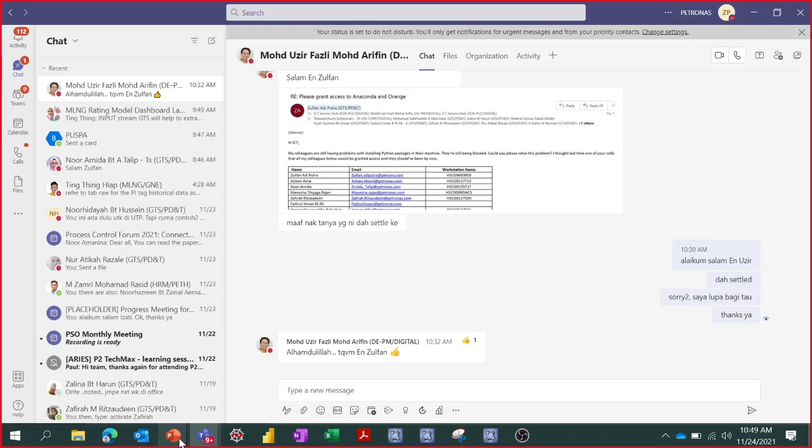Hello, sorry, oh you came back in. I clicked something, pressed the wrong button. I have to redo this. Why is it now, sorry. Okay, I'm sharing the slide. Let's share the slide. You're back here again. Good, okay, I think you can see my slide. Can. Yep, okay.

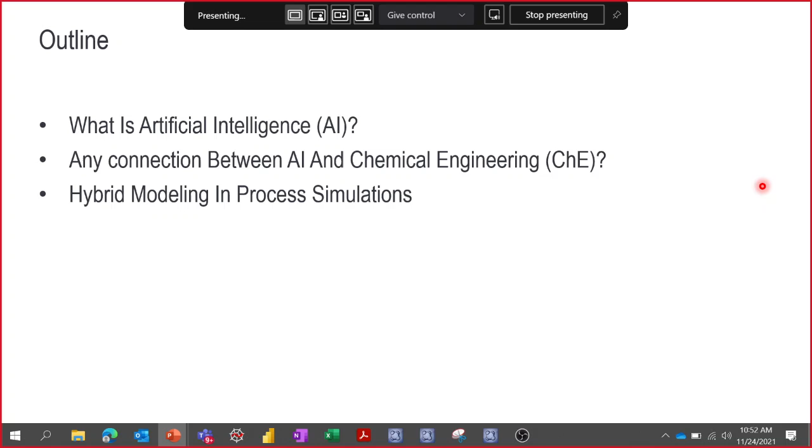So it's not just first principle process modeling as we know up until now. I'll divide my talk into: first I'll introduce what is AI, at least from my perspective, what I know, and then we'll see if there's any connection between AI and chemical engineering, because most people see AI as more like computer science, more like IT and stuff - so what does it have to do with chemical engineering? Lastly, I'll show the hybrid modeling in process simulation, and how we internally in Petronas use this hybrid modeling.

So what is AI? I think you know about this Terminator stuff. If you hear a word like AI, because of these Hollywood movies, what we have in mind is Skynet - the neural net based artificial intelligence. These robots think that humans are the cause of the planet's destruction - we have CO2, global warming, forest fires, we are destroying planet Earth. So this computer, being very intelligent, decides humans are the major cause of the planet's destruction, and so it must destroy humans first in order to save the planet. That's basically the idea of this Terminator.

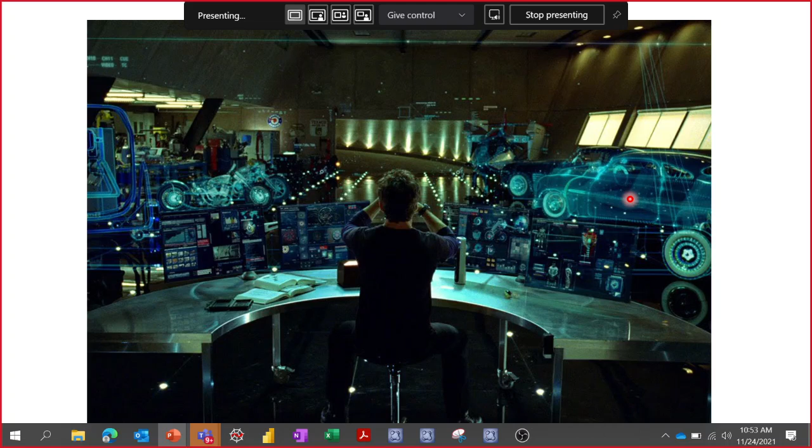That's the AI from Hollywood, and there's another Hollywood movie with the same concept of AI - you know Avengers, yeah? This is Tony Stark with Iron Man. He uses AI to help do some justice and to help people from the aliens' attack, so to say.

So one AI in the Terminator, these robots are killing humans, and then the other AI in Jarvis helps him, so to say. So that's about the Hollywood movies about AI, and then what happens in real life.

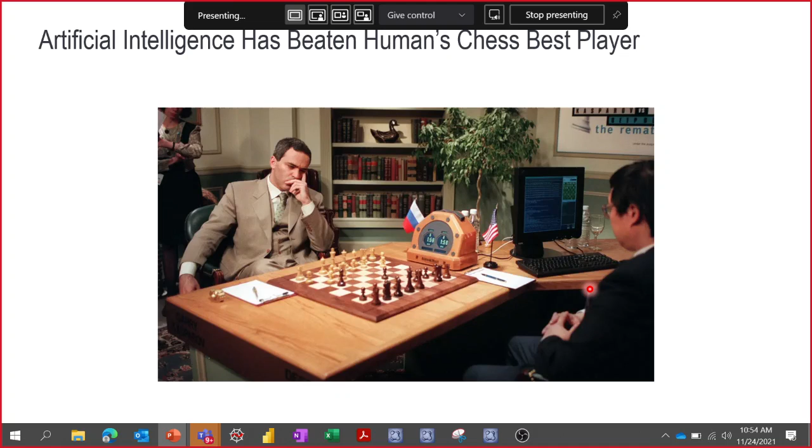In real life, I think in 1997, Gary Kasparov was beaten by the first neural network artificial intelligence computer in chess. And then about 20 years after that, in 2017, AlphaGo beat humanity's best Go player, because compared to chess, Go is very complicated.

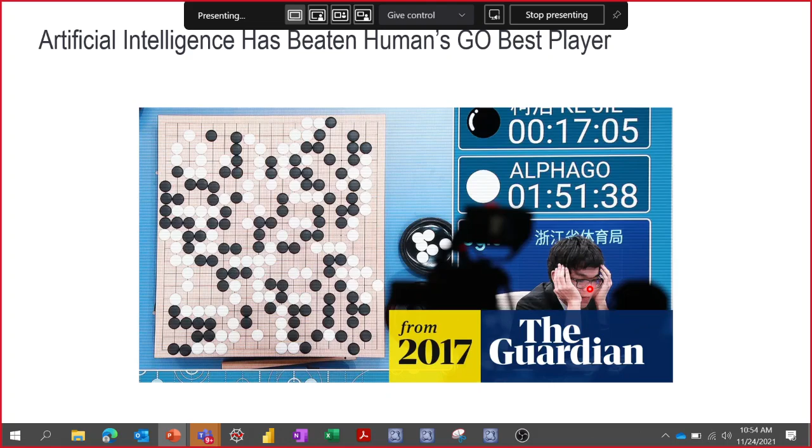It's much more complex with limitless combinations. Now programmers are developing OpenAI to use what they call reinforcement learning algorithms, so that they can beat humans at StarCraft. If you know how to play video games, StarCraft is not so strange to you.

Apart from movies, games and sports, we have been seeing these applications of AI in our daily life, for example in marketing and in travel. In travel we can see Google Maps, the easiest example, which can tell us the fastest or shortest route, and it can also predict things from images.

Google has an algorithm that uses images of the eyes to predict whether a patient has diabetes or not. And then there's also things like self-driving cars, and so on and so forth.

There's also social media, which we consume a lot. If we search something on Facebook or Meta, or on Google, the next day or next click it will recommend a web page, videos, or articles, run by algorithms behind the scene. They can bombard us with things that might interest us, so that it takes our attention.

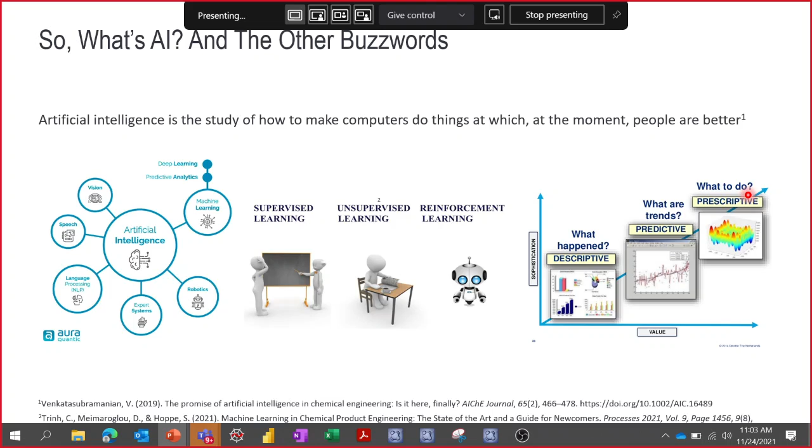Yeah, so it's more like an optimization, so to say, in our chemical engineering language. So having explained this and then trying to connect these terms as much as possible to chemical engineering field, let's

hear the expert. I think you need to go to Google, or you can search in YouTube for Venkatasubramanian on artificial intelligence in chemical engineering. It's 10 minutes, so I think we don't have time for that, but I'll just show it here so that you can YouTube this yourself.

So this professor, he wrote this article. It's an open access article, so we can read it. He lays down the historical AI in chemical engineering.

So it says that around the 1960s - yeah, much older than all of us combined - in the 1960s and 1970s, there was the first AI effort in chemical engineering, with the adaptive initial design synthesizer system by Siirola and Ruud for process synthesis. There are many other things, but I just take the major points that I think I understand.

And then 10 years later, in the 1980s and 1990s, the expert system era - more like a decision tree, if I understand it well. So if we want to design a reactor, shall we go for the CSTR, or the PFR, or the batch? All of these have merits - advantages and disadvantages. Once we have our own consideration, we can go further along this decision tree, so that these decision trees become the expert system we can follow, ending up with the best design, so to say.

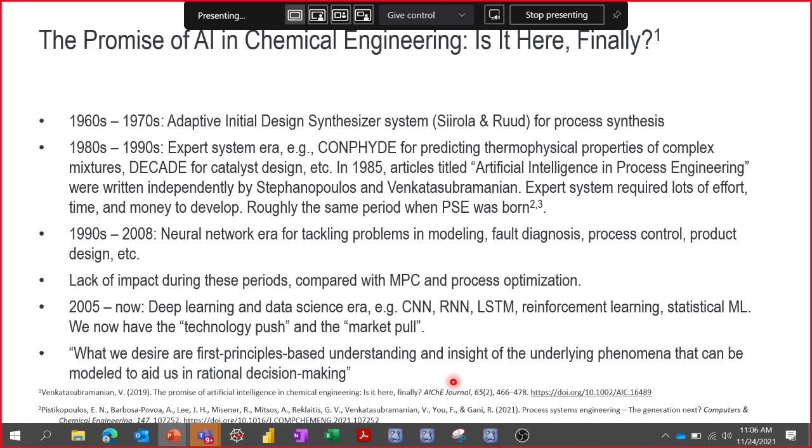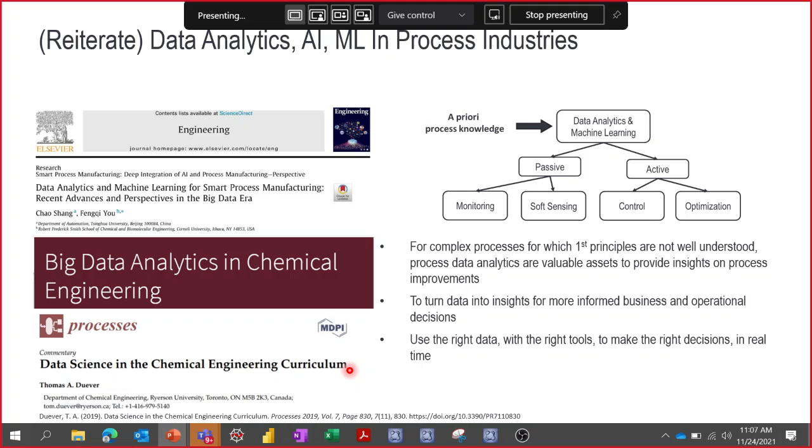So there are some articles as well, I think it's good for you to read this - from Fengqi You, also from Data Science in the Chemical Engineering Curriculum. I think in the chemical engineering curriculum, nowadays many universities are trying to incorporate data science or data analytics. We used to call this data analytics or statistical analysis in the past, but nowadays it's more fancy to call it data science.

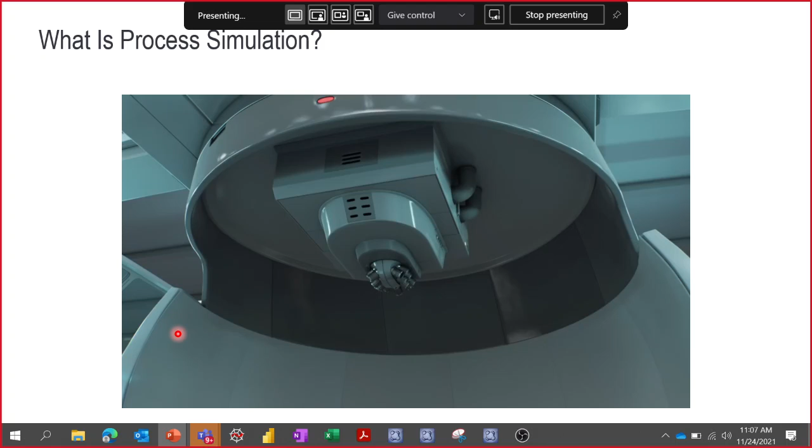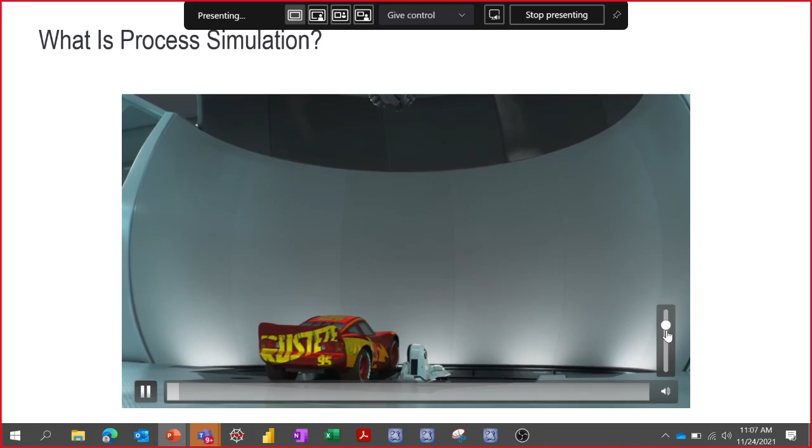Zufan, does it contain sound? Can you hear the sound? Here we go, I think so, yeah.

How do I do this? Come on, baby, Mr. McQueen. Cruz, thank you for the old man training, as crazy as it was, but I'm warmed up enough, and now I need you to launch this thing. Mr. McQueen, wait until you can handle it, please. There are no shortcuts. Okay, we'll just see about that. All right, my star racer is on the simulator. Why, yes, I am. Well, let's see you take it out for a spin. Right away, Mr. Sterling, owner of the company.

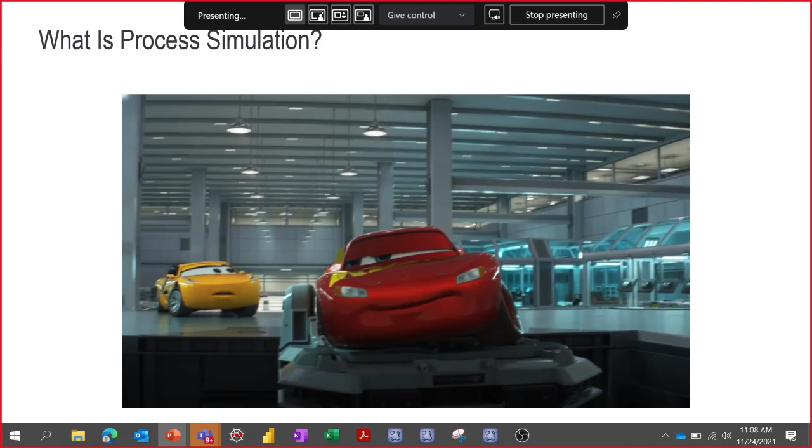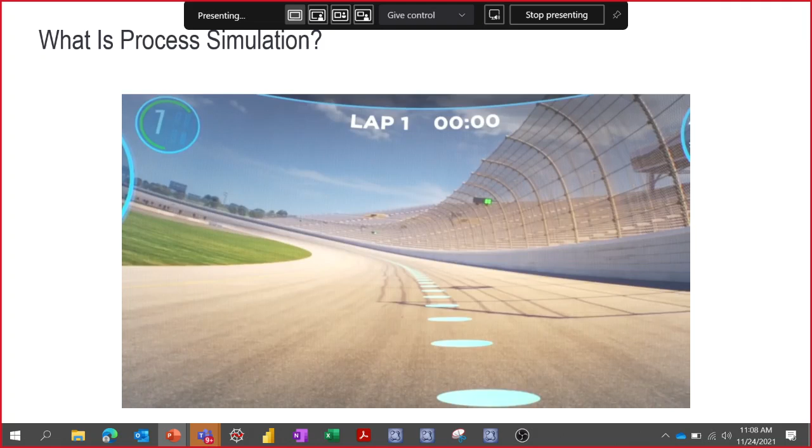Okay, have fun. This is what I'm talking about. Whoa, didn't know about those. Prepare to race. What did it say? Is it the talking? Green flag is out. I don't see the flag. What do I do? Go. Go? Go.

Oh, that's sensitive. You have hit a wall. Shouldn't be this hard, should it? You have hit a wall. You're fighting a simulator, just race like you always do. You have hit a wall. There can't be this many walls on a regular track.

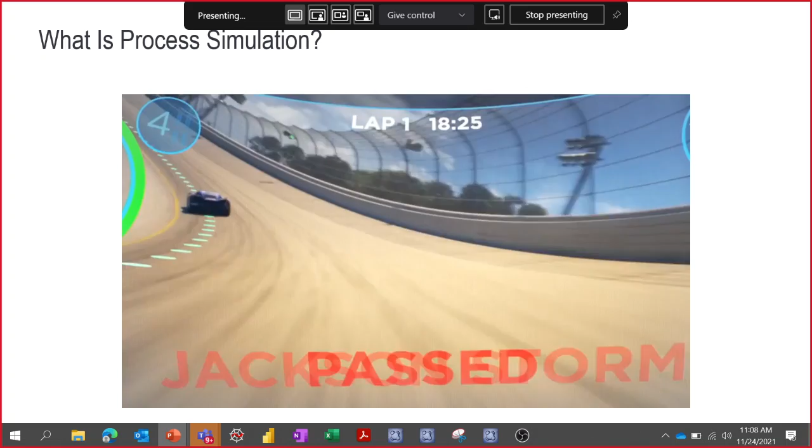You have been passed by Jackson Storm. Wait, Storm's in here? For motivation. Storm races at 2:07. Pick it up, Mr. McQueen. I'm trying.

You have hit a wall. Mr. McQueen, come down from there and we'll work you up to this. I am fine, Cruz. I can do it, okay? Whoa, whoa, whoa.

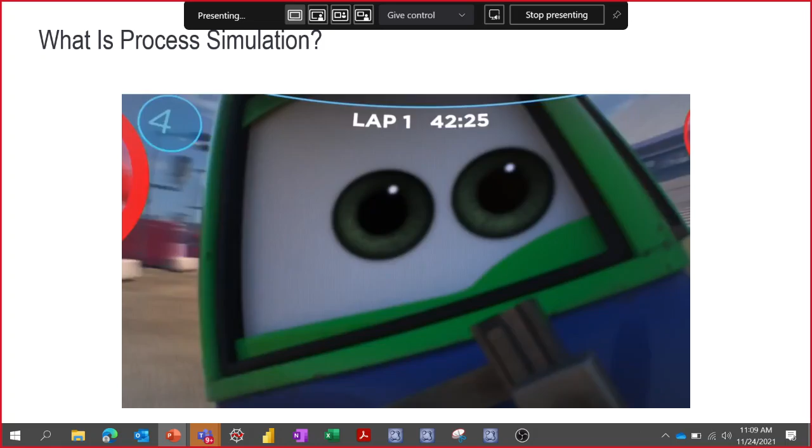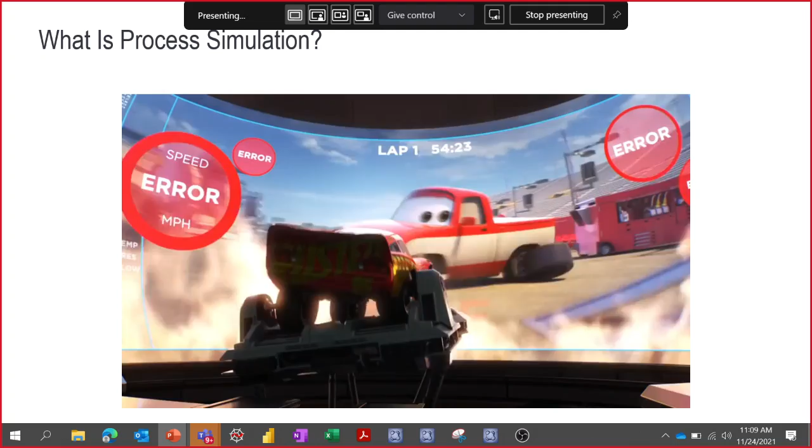Whoa! You have jumped a barrier. Sorry. You have maimed 2 vehicles. You have destroyed a drinking fountain. You have disabled an ambulance. You are on fire. Danger. Danger. You are going the wrong way. Look out, look out! Turn it off, turn it off! Get these things off of me!

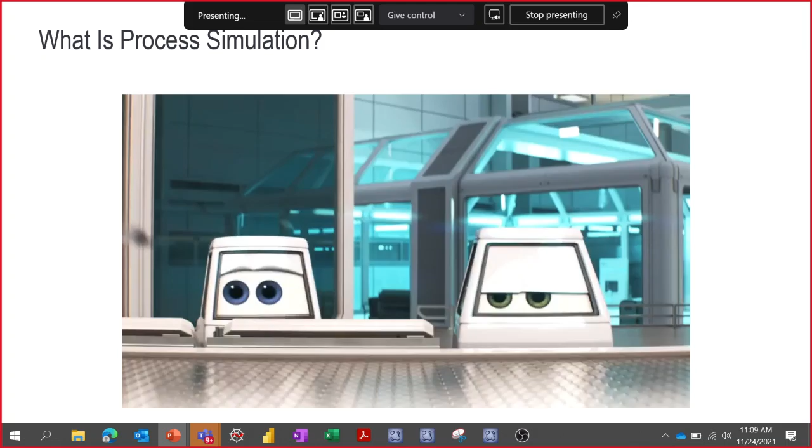You have crashed. You have crashed. Are you all right? You have crashed. I've crashed.

So I think we can have an idea of what process simulation really is. It's like we have an artificial environment where we can do whatever we want, and in reality we are not on the field like that, but we can then sense or see what happens if we change things. If we increase the speed, or increase the pressure, increase the flow rate, or reduce the flow, the temperature, and so on and so forth. So that is then the process simulation.

There are many process simulation software available for us to use. Many of them are commercial software. Like in our case, in Petronas, we are using the product of Symmetry, Schlumberger, which is very much similar to Aspen HYSYS. So if you know how to use HYSYS, because HYSYS is one of the first to enter the market, so they are more well known. So if you know how to use HYSYS, you know very much how to use Symmetry.

We also have from Aspen Tech, instead of HYSYS, they also have Aspen Plus, and they have this Aspen Exchanger Design and Rating as another toolbox. We also have Pro II from AVEVA. We have PetroSim, which is also very similar to Aspen HYSYS. We have gPROMS from PSE, and now they are under Siemens. We also have Mobatec Modeller. I don't know if you're aware of it, but one of my friends founded this company, and they make the Mobatec company. We also have Unisim, which is very much similar as well to PetroSim and HYSYS. This Unisim is under Honeywell.

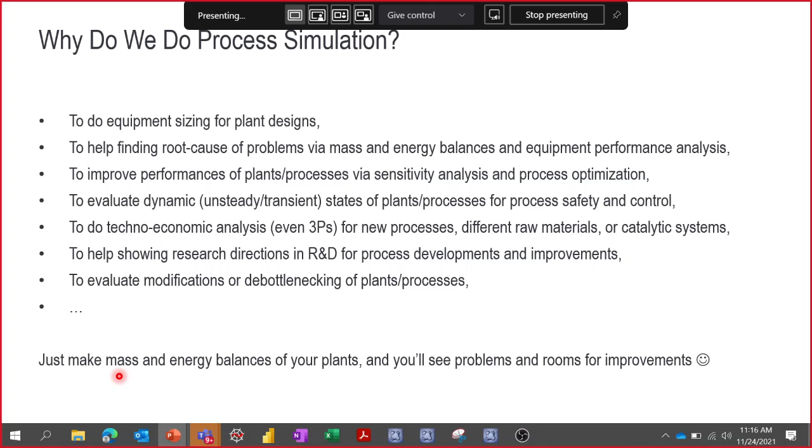Lastly, I'd say, that's it for me. Just make the mass balance of your plants or your process, and you will see problems. And there should always be room for improvements. Now that's about the simulations.

Now, why hybrid, and what is hybrid by the way? This hybrid refers to situations where, on one hand, we have first principle modeling - the ones we've been using so far, the mass energy balance, the thermodynamic model - all of this is more on a mechanistic way that we understand. So if we open a valve, the flow rate will increase depending on the size of the pipe, and depending on the density and viscosity of the fluid. So we know this - that's our physics-based, or first-principle-based, understanding.

On the other part, we have processes that are very complicated - for example, membranes. It is not found in all conventional process simulation software, but we have experimental data for the retentate or permeate of a particular membrane. Different membranes have different properties and characteristics. So we have the data, but we don't quite have the physics-based model for that membrane.

Using the data, we can make a regression - for example, a simple linear regression like y equals mx plus c. We model that, and put that model into our process simulation software, such that the inlet of the membrane is calculated by HYSYS, for example, or Aspen or Symmetry, and then it's calculated into these regressions, and the output of that regression is sent back to the process simulation environment. So this hybrid is more like combining first-principle-based and data-driven models.

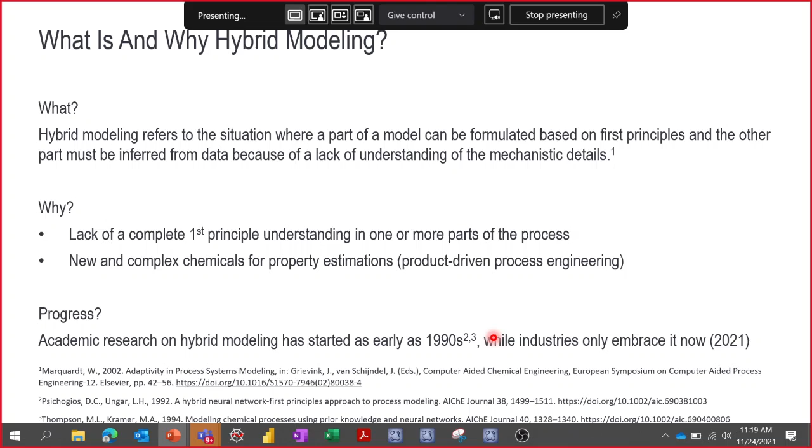How is it then progressing? As we understood from the paper by Professor Venkat Venkatasubramanian, in the early 1980s and 1990s was the era of neural networks. So this hybrid modeling already started around those years, 1992, 1994. You can read the articles over here. And while the industries, as we know, AspenTech only embraced it now. So we have about 30 years from research to industrial application. It took 30 years to appear in industries.

AspenTech in 2021, with the latest release, I think they are now on version 12.2, but starting from version 12.1, they already had these 3 parts of AI, what they call industrial AI. So they have this AI-driven hybrid modeling, the reduced order model. The AI-driven hybrid modeling is the one we've been talking about, where we have the process simulations and also data-driven models, combined together.

Reduced order model is when we have simulations, for example a distillation column, and because a distillation column is very difficult to converge, we just need to run a couple of experimental runs on these simulations, and then use that data to make a regression. That regression is what we call a reduced order model.

The last one is what they call, for example, when we don't have any fouling factor - we don't know what the fouling factor or the overall heat transfer coefficient is, but we do know the inlet flow rate, the inlet temperature, and the outlet temperature, from which we can make a correlation for how much the overall heat transfer coefficient is, for example. That is taken care of by this third option in the AspenTech software.

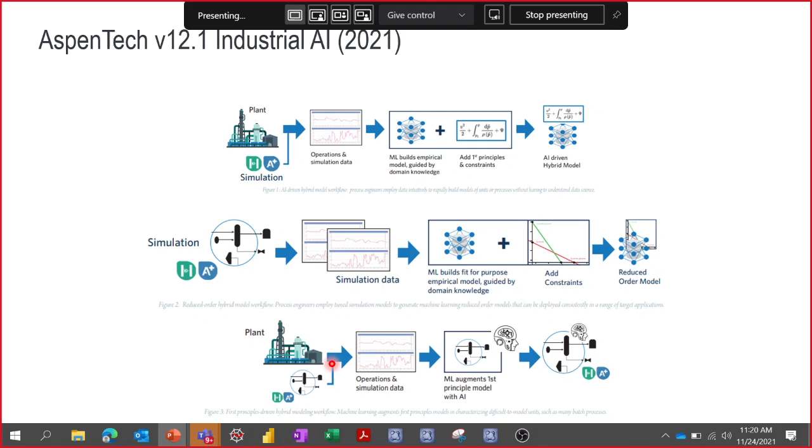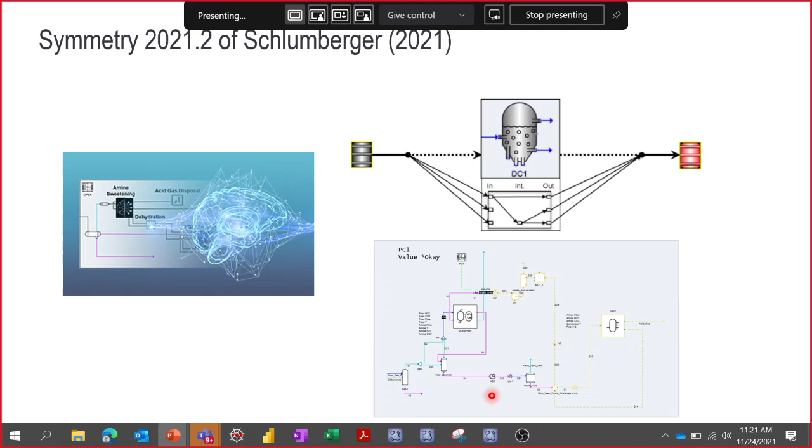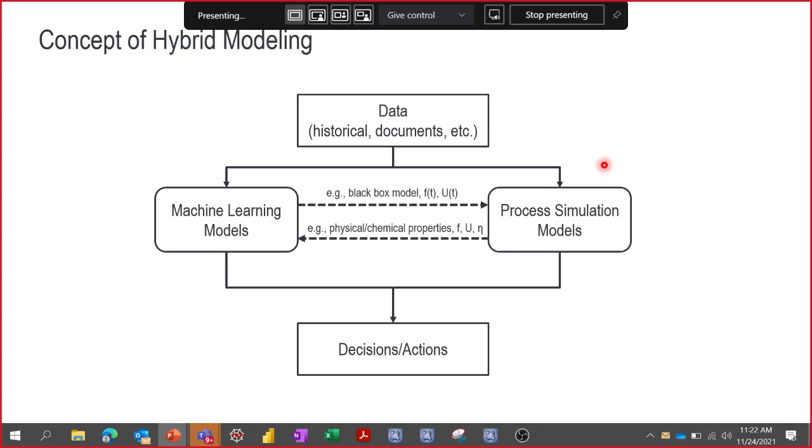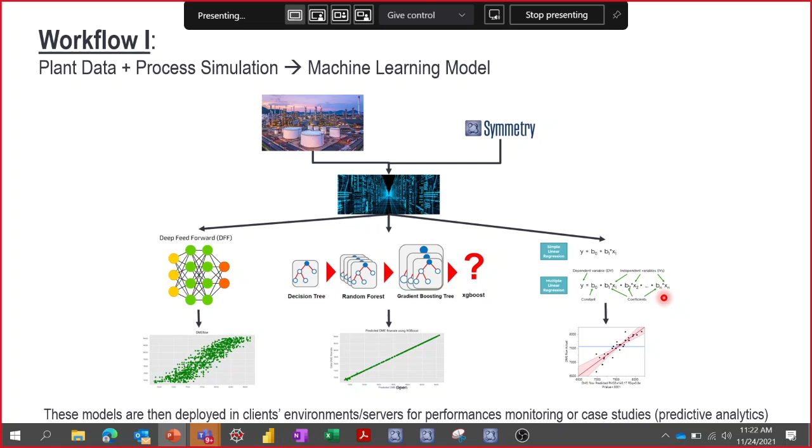So it's a very surface-level definition I'm giving you, about the workflow that we have been doing. Just to repeat, for the benefit of repeating: we have the process simulation software and the plant data. We combine these two sources of information. From there, we can develop all kinds of machine learning models, like neural networks or decision trees, or simple regressions like linear regressions, multilinear regressions, or non-linear regressions. And then from this model, we can use this model.

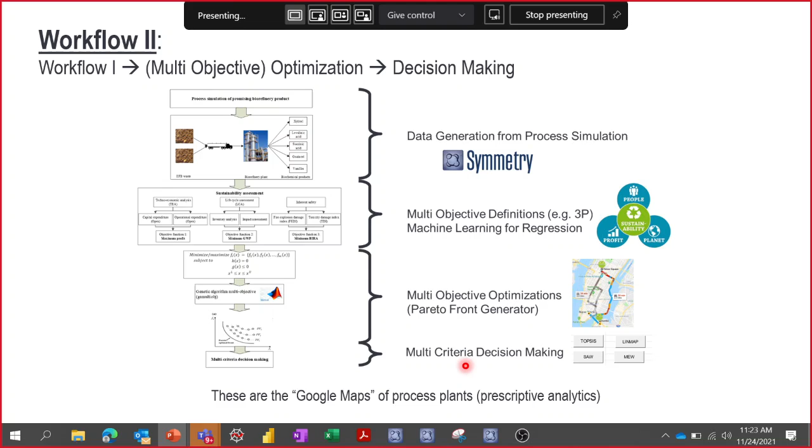It's a unit that has a series of heat exchangers, flash vessels, and then a stabilizer column. The goal is to get the RVP below 12.

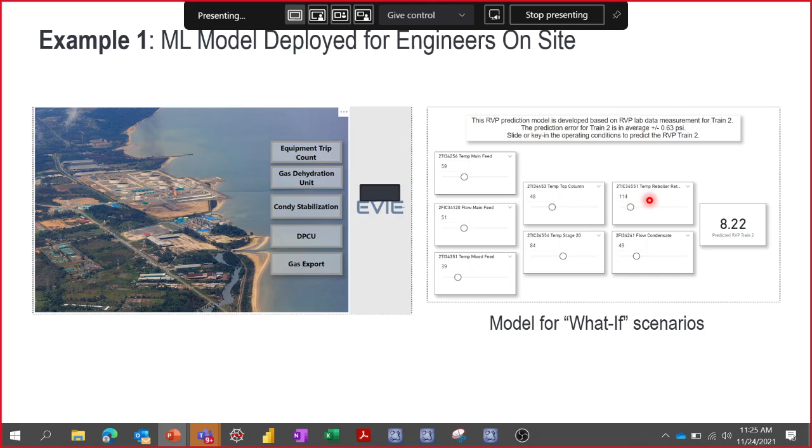Another one is that we use it as a benchmark, what we call the ideal target. So to get this water dew point, what is then the minimum reboiler duty? This is then our theoretical target.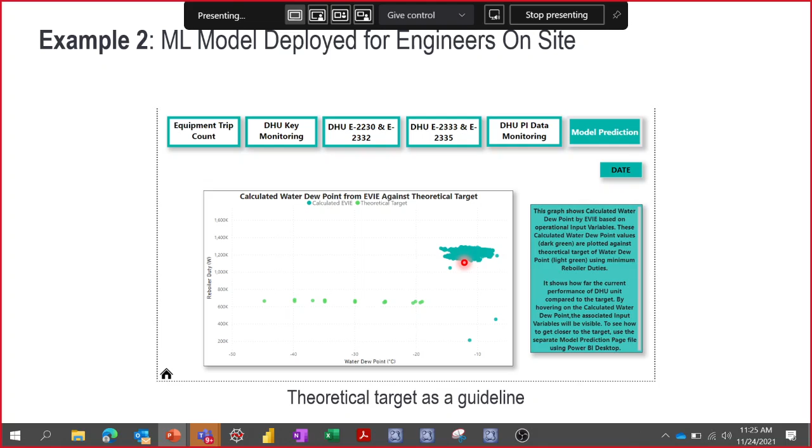This is the data that we are collecting in the plants. We know from the handles or operational variables they have been using that they are far away from the ideal target. It shows where they can go theoretically. So the aim is to change the independent variables, or the X, around this area in such a way that they can reduce the energy consumption.

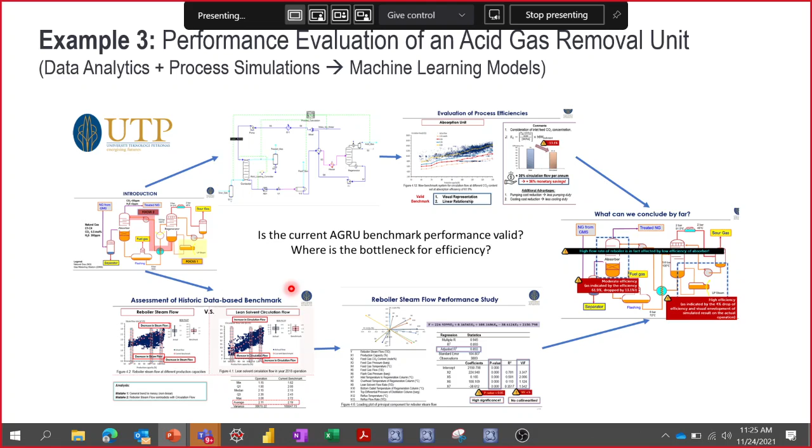These are some studies I've done with students from UTP as well. We have this AGRU from the simulation and also from the data, and we try to converge the information all together.

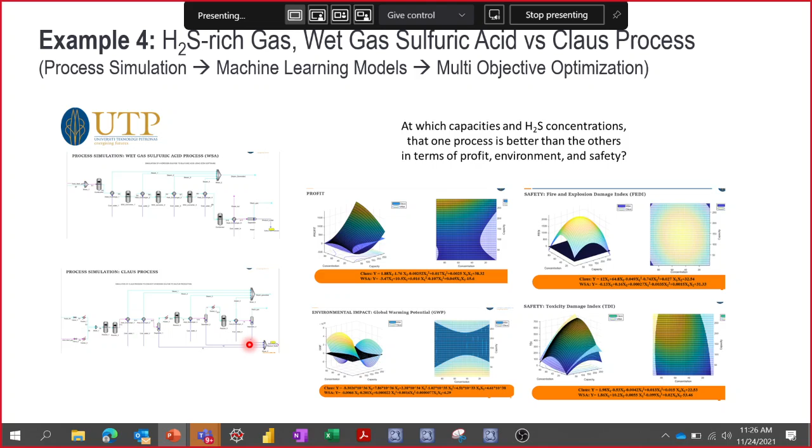This is also another one. We have two options for handling the acid gas: the Claus process, or the wet gas sulfuric acid process from Haldor Topsoe. At which capacities and concentrations is one unit then better than the other.

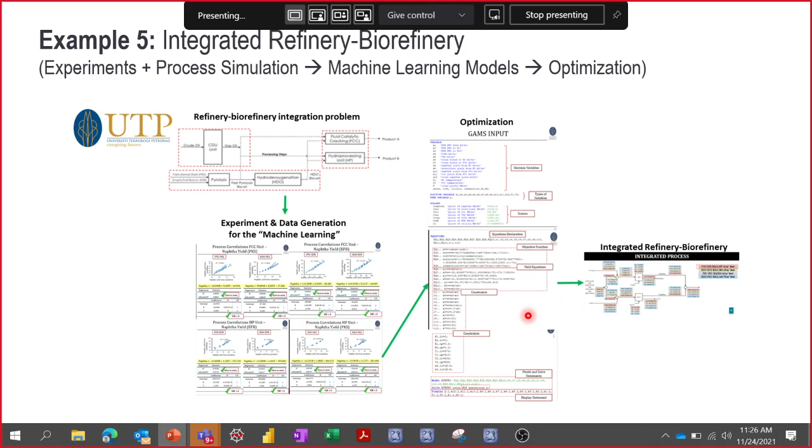There's also integrated refinery and biorefinery. We make the model, generate data, and from that data we make a regression model. That regression model we put into GAMS optimization software, so that we can optimize it for our own purpose.

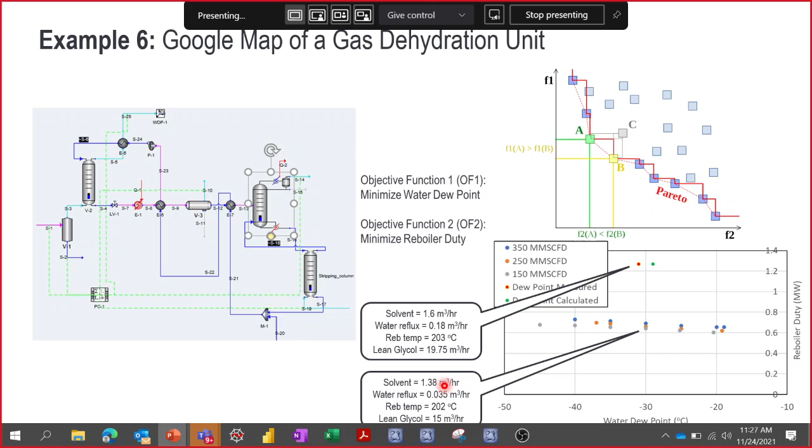So it's more like another set of solutions - there are many solutions. Each of these dots represents all of these handles, the independent variables. We'll skip this, and there are many more examples.

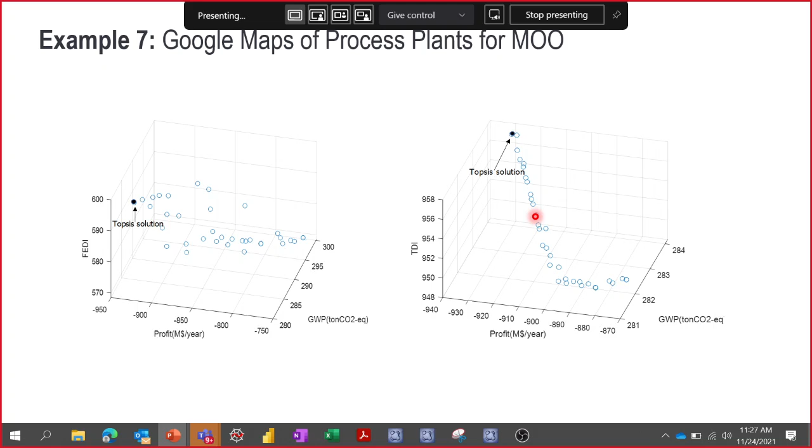So lastly, I think I have 3 minutes left, so hybrid modeling in Symmetry. Internally, like I said, we are using Symmetry, and the latest versions of Symmetry have a hybrid modeling approach which we can use. The one I've done personally, we have this CFD first principle based regression.

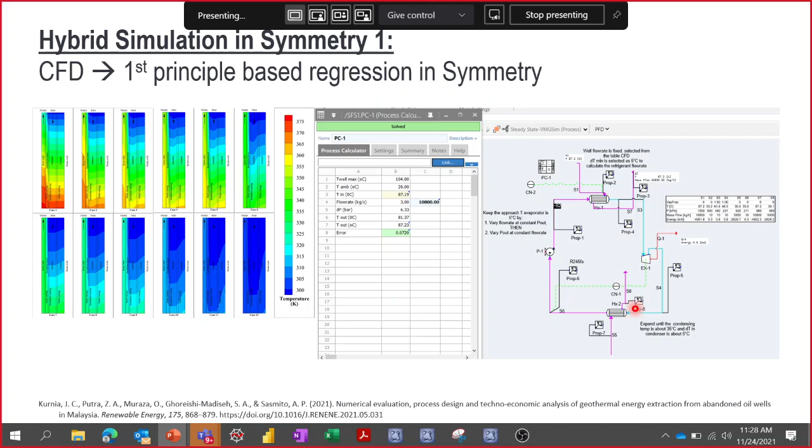This is from the old days before the hybrid modeling of Symmetry was released. We have the CFD modeling of wells, like oil wells, and I make a model of the outlet temperature and pressure drop, and put it into this process calculator. So it acts like these wells, and it's connected to the Rankine cycle, so that we can do some more analytics on this. That's an example I've done - I think it was published this year, but I did this work in 2019.

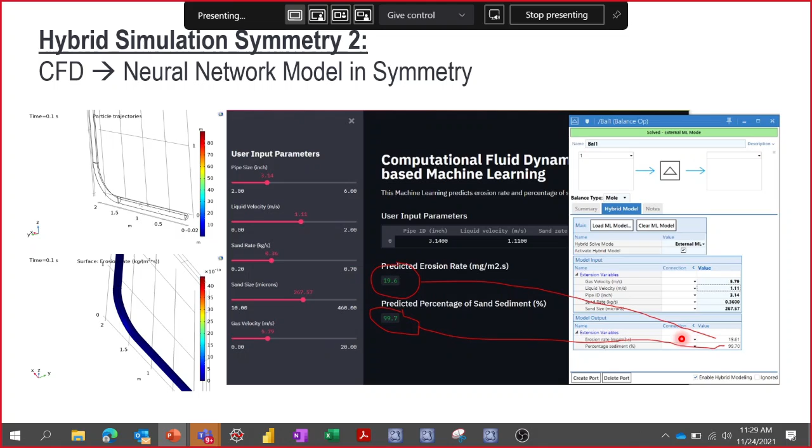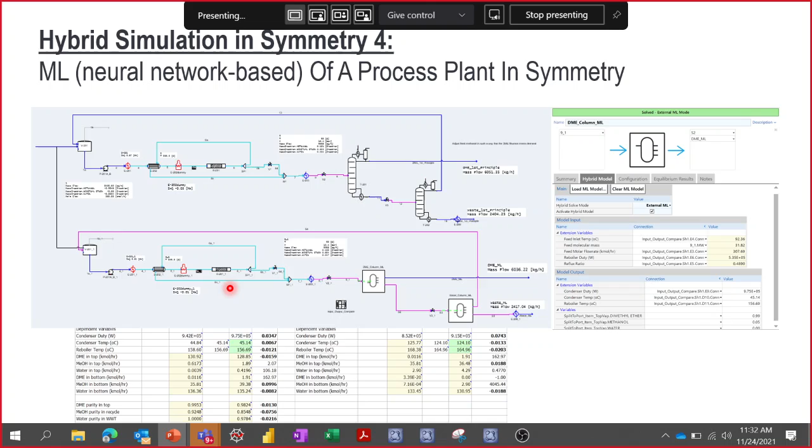I think I've shared what I can share in this 40 minutes roughly. So if there are any questions, please let me know. Now I'm opening the chat.

Perhaps you can tell a bit more what is the advantage of using machine learning compared to the simulation in the hybrid model just now. If you don't do machine learning, you can still run the scenario using iCON or your simulation model. But what is the advantage when you have the machine learning tool? Would you get faster results, or is it more accurate, or what?

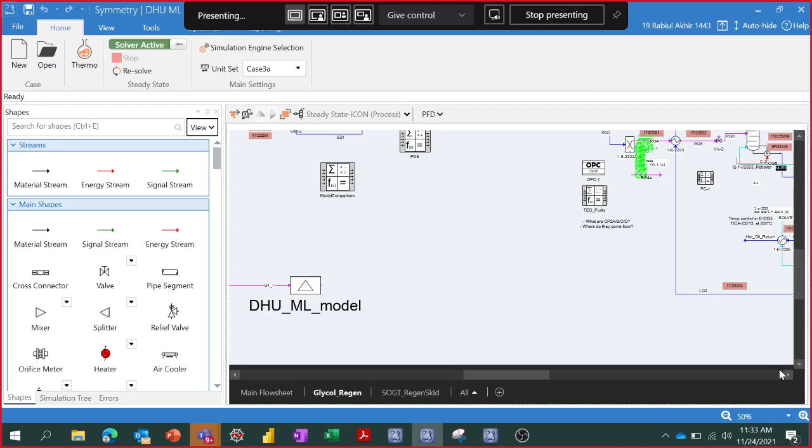You can see my screen. Here I have, I need to make it smaller. So it's basically the same as the one that I showed earlier, the gas dehydration unit. Bear with me, it feels a bit slow now, I don't know why.

So we have this gas dehydration unit plant. This is the plant. We have the feed gas coming in, we have the glycol running through the system, and we have like 1, 2, 3, 4 recycle streams where we have to converge.

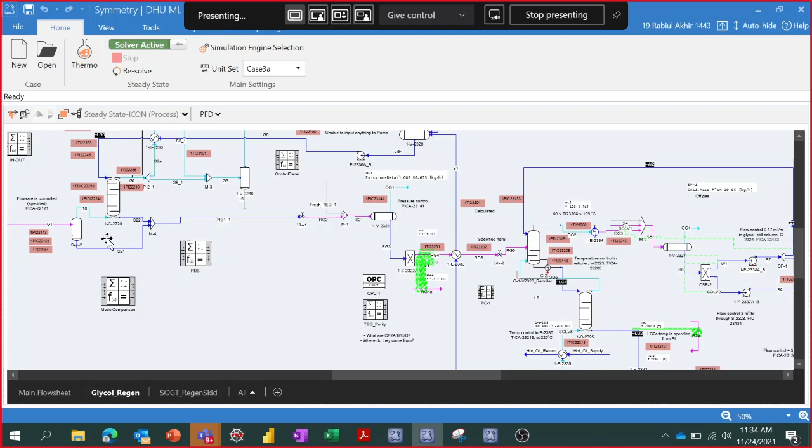If we say, for example, let me change this, let's model comparison. So all of this is in here. This is then the machine learning model over here, mimicking the whole flow sheet.

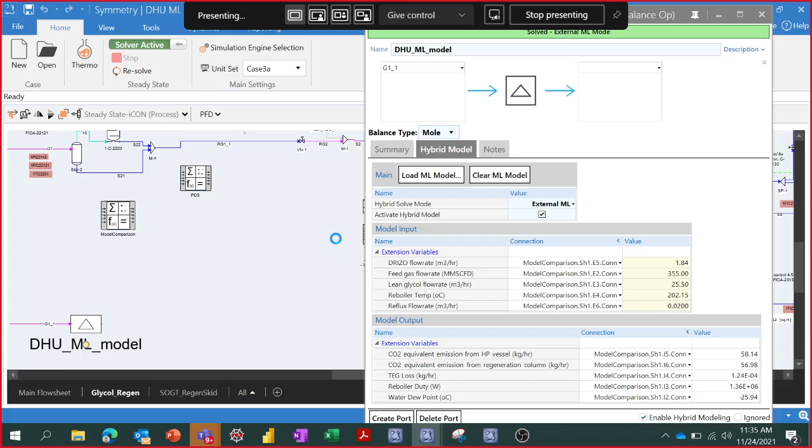What I have over here is I've compared the first principle model with the machine learning model. For example, I have this input, and this input goes to the first principle model, and then I have another input that goes to the machine learning model. So you can see that 355 is then the flow rate, the feed gas flow rate. So 355 is the feed gas flow rate over here, and then from here, this is then our feed gas.

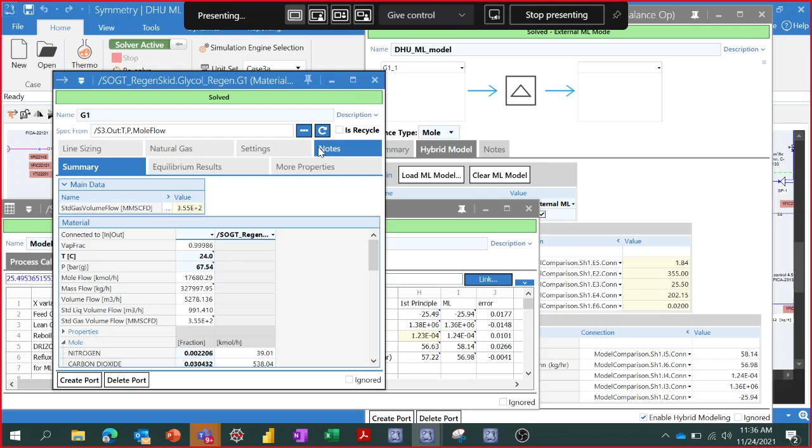So I'm hoping that this is also like 355. It's very slow, I don't know why. So this 355, we know that this number is 355 million scuffs. So if I change this to something, for example, 360.

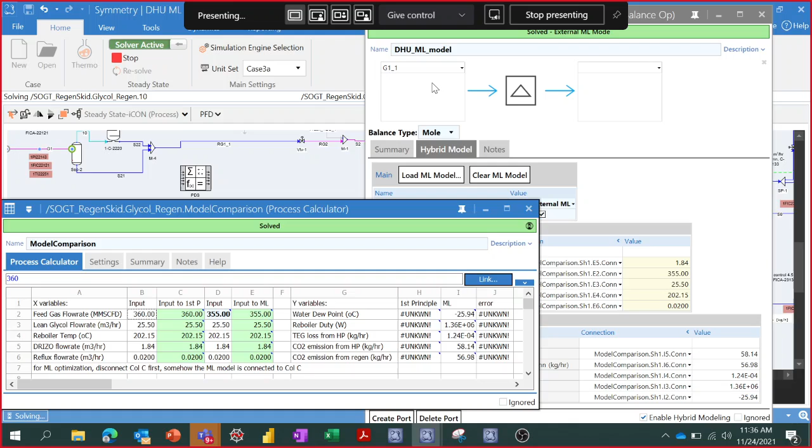So I'm now changing the input to the first principle model and see what happens. If I change this, this will change, and that will change as well. So it's now updating the display, and I will then try to calculate with the new input. You can see how the calculations are run. In symmetry, we can see which unit is now doing the calculations. It will then take some time, it will do this iteration and stuff.

So until then, we don't have any results in the first principle model, basically.

So you can imagine now, if we have this model deployed into the plant, so that the operators can use this model, and if they want to do like a sensitivity analysis, for example having gas flow rate 360 instead of 355, what happens to the water dew point, if they want to do that, they have to go to this model and change it, and then they will have to wait for some minutes, so they can go get some teh tarik or kopi tarik or maybe roti canai, and then come back, and hopefully the simulation will converge. So it takes some time.

Maybe also adding to this, my computer is now very slow for today, which I don't know why, so it takes more time, not even some time. Maybe because you have Teams running. Could be.

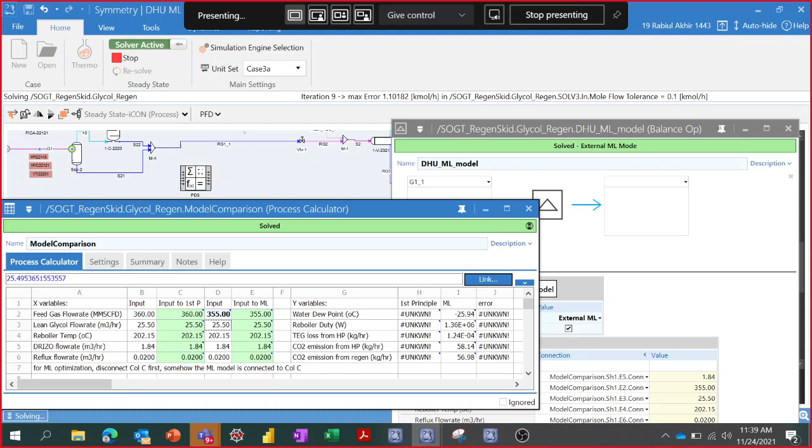How much time do you need to build this model? It depends, because it's very much dependent on the complexity of the model. Even though it's simple, with only 3 distillation columns, basically the absorber, the regenerator column, and the stripper, so 3 columns with these 4 recycles, and also depending on the bounds of the variables. We cannot have a very low reflux or very high reflux, otherwise the column will flood and it doesn't converge. So in this particular case, being very careful on the inputs to run the experiments, it took me 6 days, day and night.

I was supposed to have more than 20,000 data points, but this particular model doesn't converge that easily, so I got only about 5,000 to 6,000 converged simulations from that 6 days and night. And then with these 5,000 simulations, I developed the machine learning model and made the codes on the symmetry.

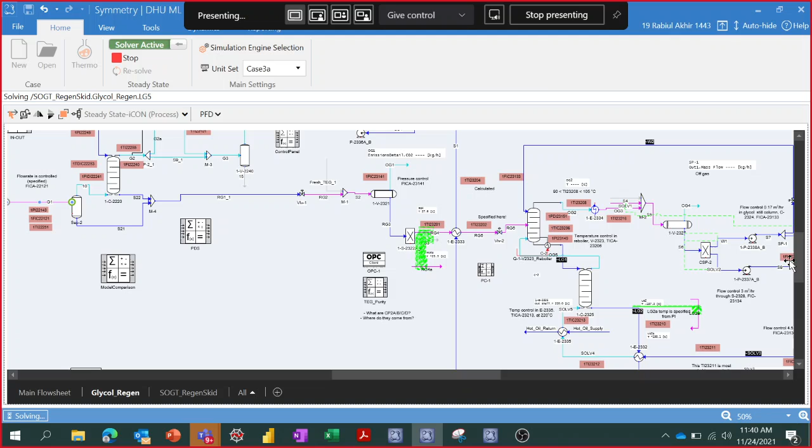Developing the machine learning model is very easy, because that is not the most difficult part. It took me another 2 days to develop an acceptably accurate machine learning model, and another 1 day to deploy this. So all in all, it's about 9 to 10 days to make this.

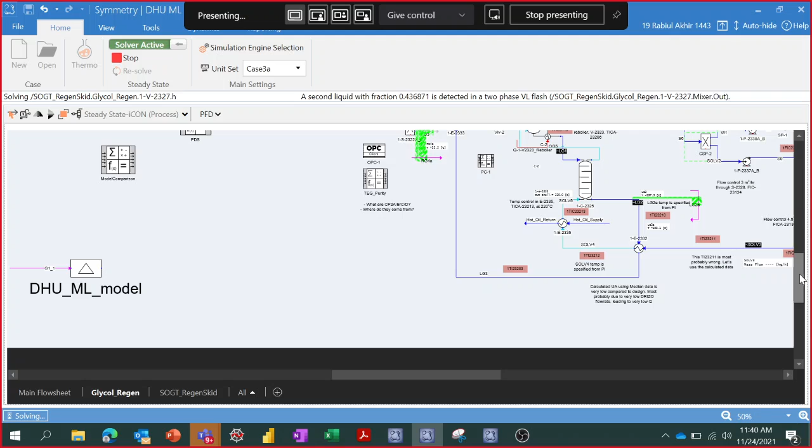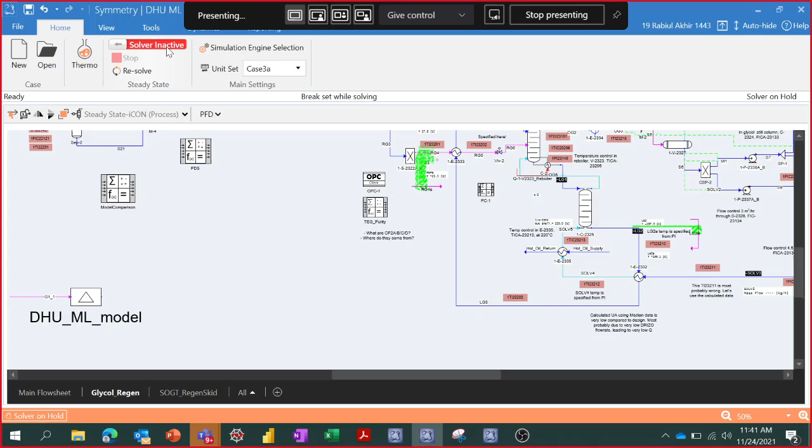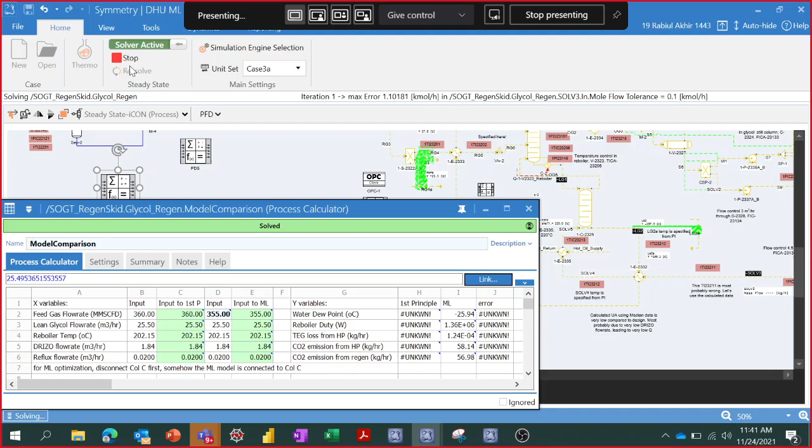So I guess you need to talk to the engineers in the plant to get some data for verification as well, right? Yeah, this is basically the verified data, Dominic, already a verified data. We can discuss this in detail in another session, but this is already verified data.

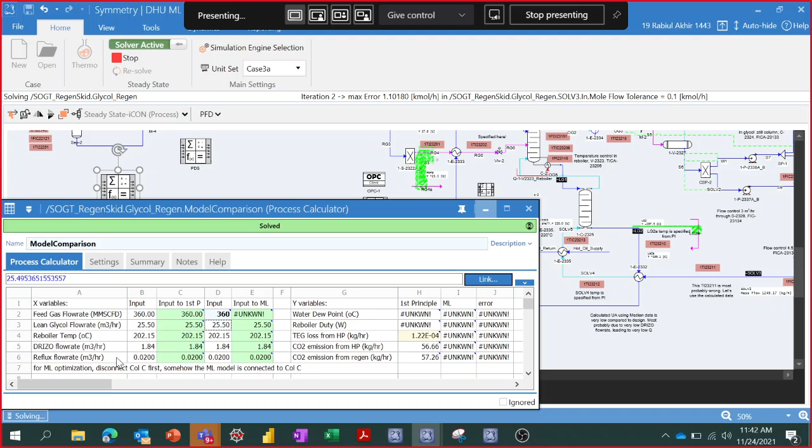Means the run is this - oh, it doesn't want to stop, yeah. Okay, I'll close this and then I'll change this to 360. 360, okay, 360, yeah, and activate this. Now I see everything's mixing up, it's supposed to be very quick, but it's very slow, I cannot move, I couldn't even move this. I'll have to open the other one.

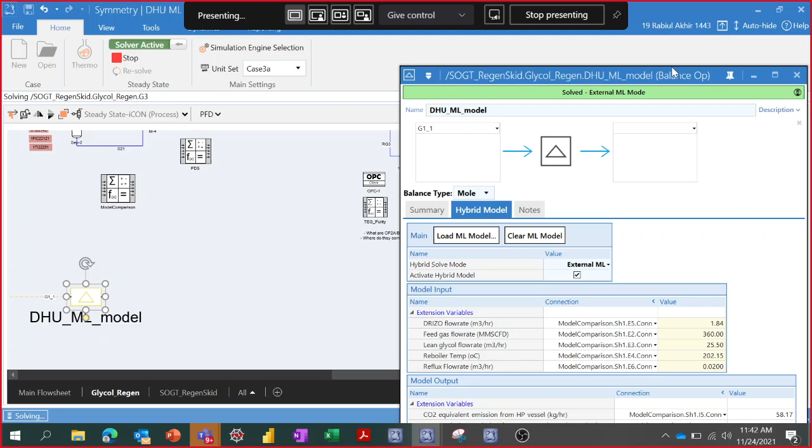So basically this one is done, so I need to put this up, close this. See, as soon as I change this to 360, everything here is calculated already, so I get the results. It's just that the result is not being imported here because this guy is still busy calculating the first principles one, so it's not imported into this column, but we have the results over here already.

So when we deploy this model in the field, the engineers can easily change the inputs and see what happens in a very quick way, compared to these first principle calculations which already take some minutes to converge.

I hope that shed some light, a little bit there. While waiting for this to converge, is there any other questions? Why is this so slow? No, I don't see any questions. Come on, students, please ask me questions.

So how's simulating life, yeah? Is that an interesting course or what not? Because I keep telling the students as well, this simulation is just like a calculator with some thermodynamic models behind it, yeah.

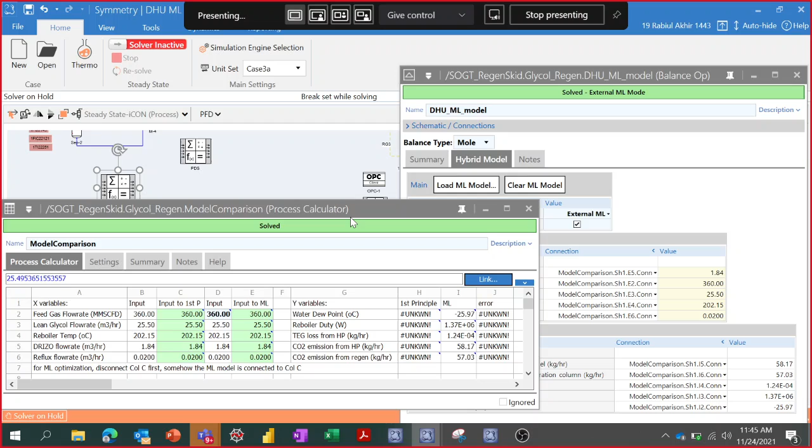In some of the plants we have a server, and we install this iCON on that server, so they can have access to it. That's the workaround we do now - they can run it if they want to have access. We're thinking to have our own server so GTS runs it on site, so we can deploy all the models there and give them access to our server. That's what we're thinking in the future.

But how many of them will want to do it themselves, or will they call you to do it for them? Developing this, they will call us. But running it, since we let this run 24/7, sometimes there are hiccups here and there, and they will call us. The model should run but gives some problem, and then we look into it. Sometimes maybe the electricity went out, or some IT issue we don't know about - in the end we have to go and solve it.

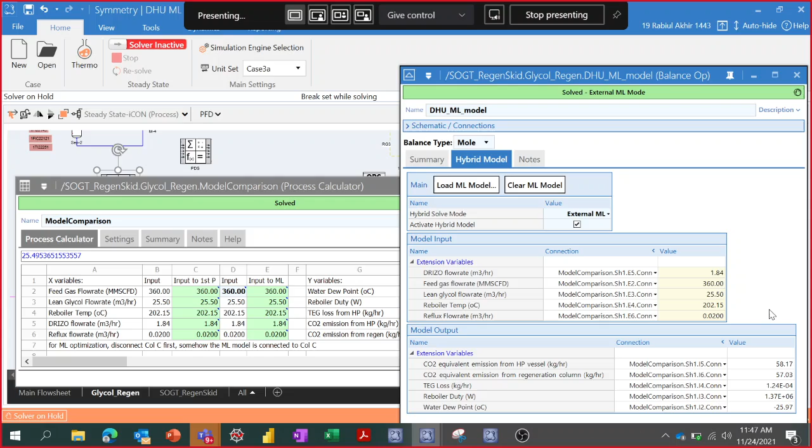True, that sometimes takes time. Good.

Any questions from students? No. Oh, Dr. Chan is also here - our other colleague, co-teaching. We each teach half. I don't know if you've met her, Dr. Chan Yijing. No. She also teaches the dynamic simulation. Okay, very good.

Do you do any work on dynamic simulation? Yeah, we do dynamic simulations mostly in process control and process safety.

One of the last projects I did involved columns with several process safety valves. During the HAZOP there was a concern whether these safety valves were adequately sized. So we took the data sheets of the safety valves, the data sheet of the distillation columns, and the arrangement of the pipings and hydraulics around the system, and modeled that in this iCON. Then we introduced some deviations, like cooling water failure or reflux failure, and saw how the pressure built up in the column. That's one of the dynamic studies we've done.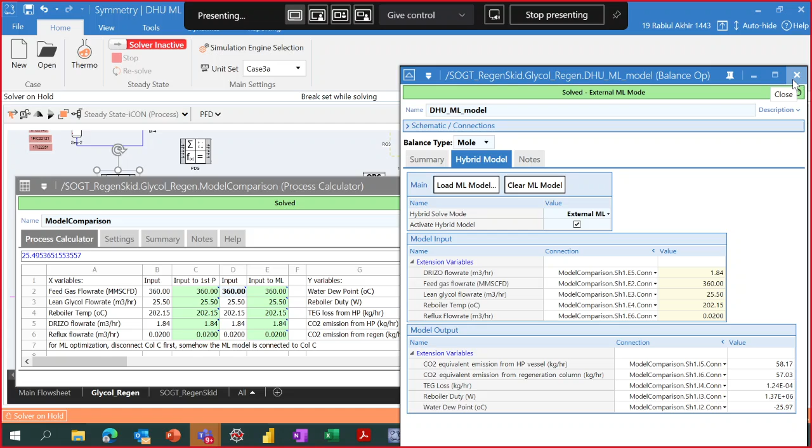Another one is the gas system - we have an offshore platform where we modeled the new control setup. These two are basically about how fast, or how much time, the dynamic simulation takes.

Oh, that's good. Probably Dr. Chan can invite you for her lecture next time. Okay, no worries, no problem.

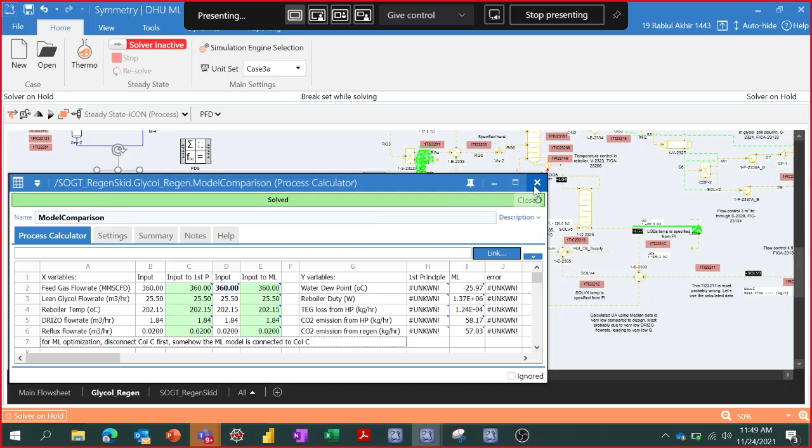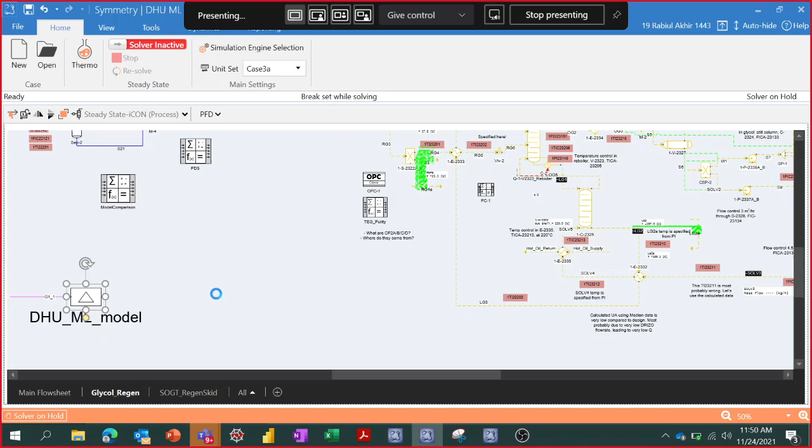Oh okay, will take some time. How do you differentiate between first principle and the other model again? First principle is based on mass balance - it's what we know, the mechanistic detail, the mass energy balance, the thermodynamic models. This thermodynamic model is part of it because we know the model is PV=nRT, and we have R there as the unknown, and all of this is basically a regression, so to say. Nonetheless, if we have a black box like this, we call it a data analytics model, and the conventional simulation with conventional unit operations we call a first principle model.

What about the machine learning model - is that first principle or second principle? There is no second principle, I don't see any second principle. The machine learning model is basically a regression model, so to say. So there's only a first principle model, no second principle - otherwise people would ask, what is the third principle? No, first principle is basically the physics-based model we know, the mechanistic model we know.